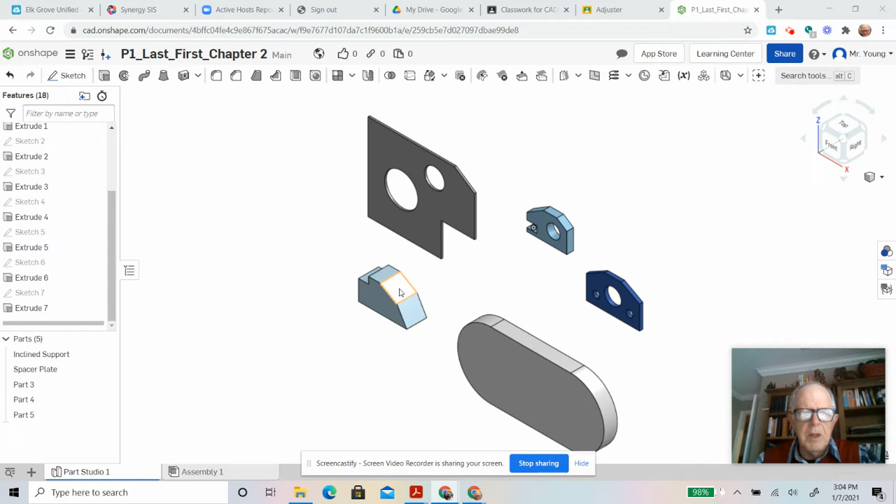Alright, so I'll make it a little bigger, bring in the dimensions real quick. Okay, there we go. Alright, so we've gone ahead and done this. I've talked a little bit in class about how to make that, extruded it.

Now we have to cut this inside out. So let's look at that. We know the whole thing is 1.5 wide from back to front, and up here it tells us that the thickness of the sides are 1/4 inch. So 1/4 inch plus 1/4 inch makes 1/2 inch. So this inside is 1/2 inch less than this, which of course would be 1 inch.

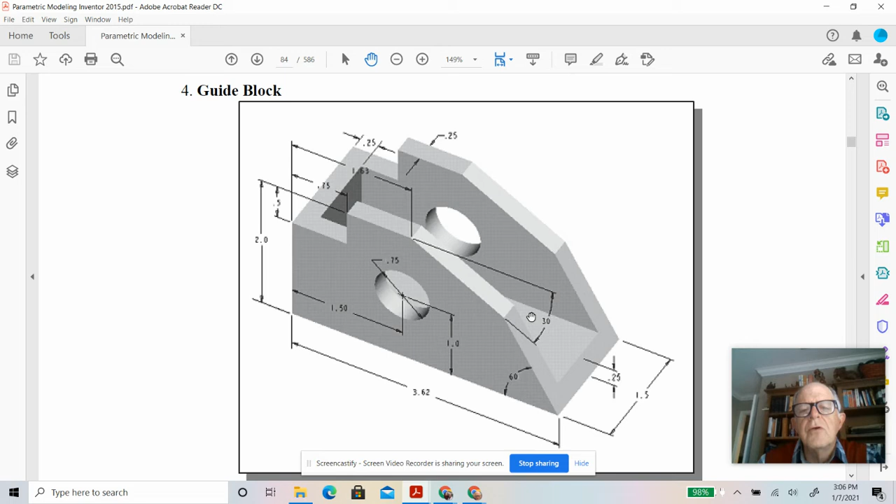It's also 1/4 inch here. Now, how deep is this cut? The cut goes all the way down to the bottom on this inside bottom. The whole thing is 2, and it tells us the thickness of the bottom is 1/4 inch. So it's 1 3/4 from here down to that surface. So the cut has to start on this surface and go all the way down to within 1/4 inch.

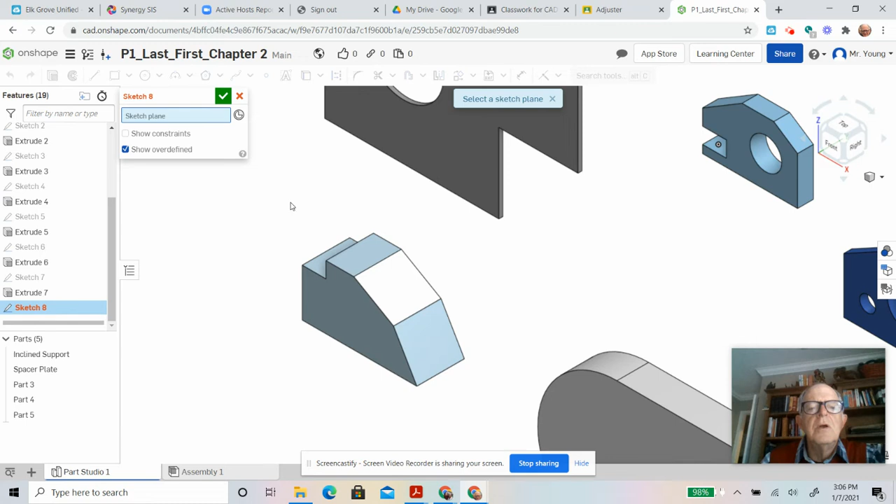So I'm going to draw a sketch. Always we start with a sketch. We're going to draw it on that plane. I'm going to look, that's the top. So look at the top. And I'm going to draw a rectangle, and the rectangle is supposed to be something like this.

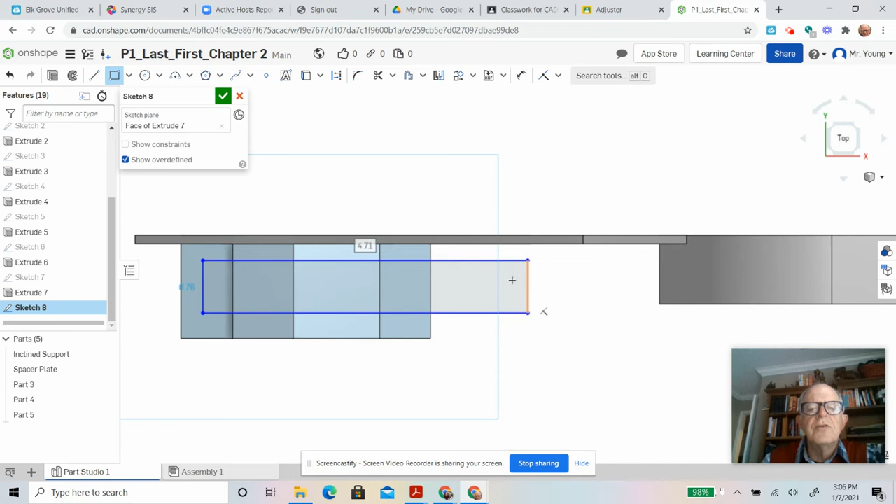Now, remember it's going to subtract. It doesn't matter if it's sticking out. It's just going to subtract what's intersecting with the other.

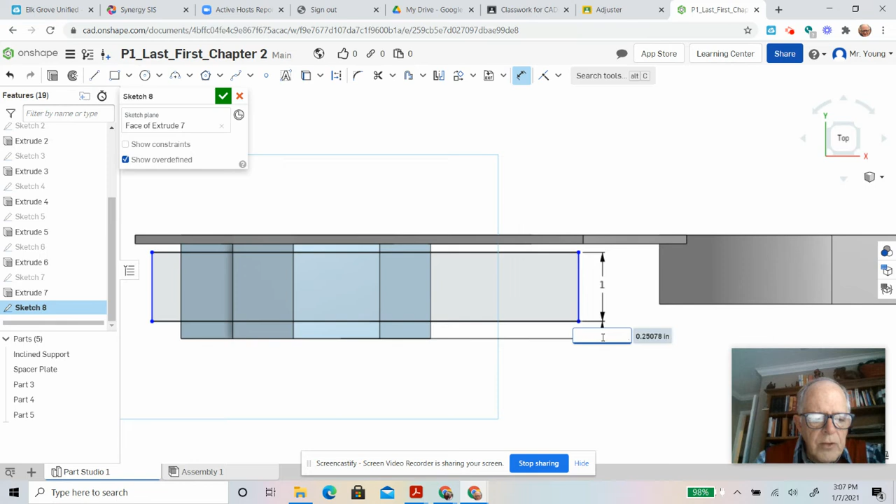We know that this thing has to be, we just said it was 1 inch wide. You can go back to the book and see why that is. And we know that from here to here is 1/4 inch. That means the other side will automatically be 1/4 inch.

Now, I'm going to get out of my tool here, grab this and yank this in here, because that has to be 1/4 inch also. So just dimensioning the rectangle to the proper size.

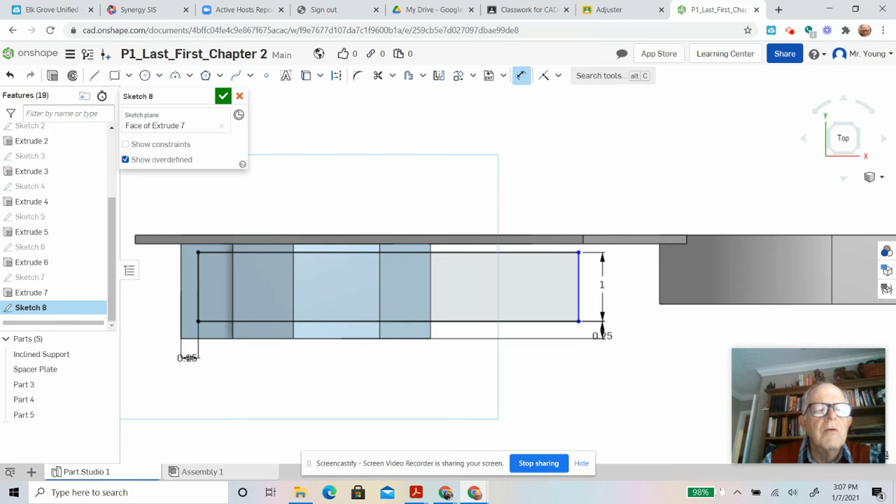All the thicknesses of the sides are 1/4 inch. Now, you can see what I've done here. I've kind of drawn a box on that top surface, inside that box, 1/4 inch from all the sides.

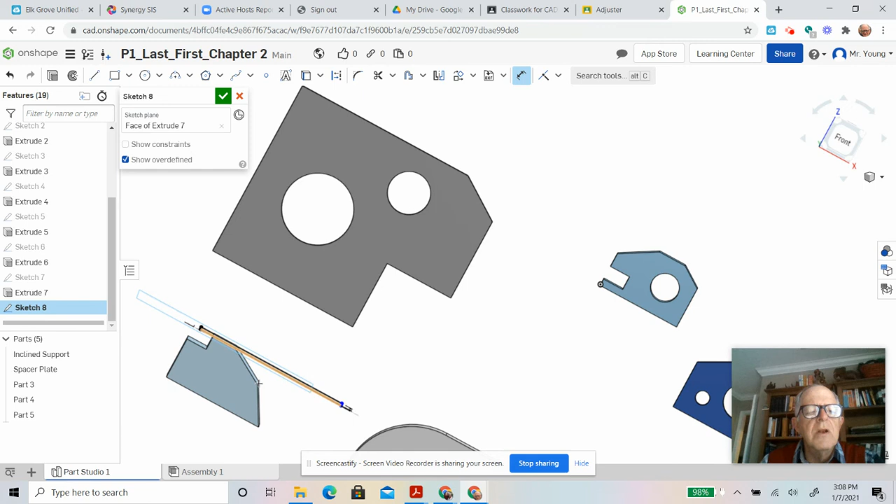And I'm just going to cut it down to 1/4 inch from the bottom. This part that's sticking out, no biggie - it will just subtract from the air, and the air will still be air. But wherever it intersects the solid, it will do its thing. So the sketch is done.

We extrude. We're removing material. And you have to do all - it's interesting, this is not how it is in the other programs I've used. You have to pick all 3 of those. And the depth we said was 1.75.

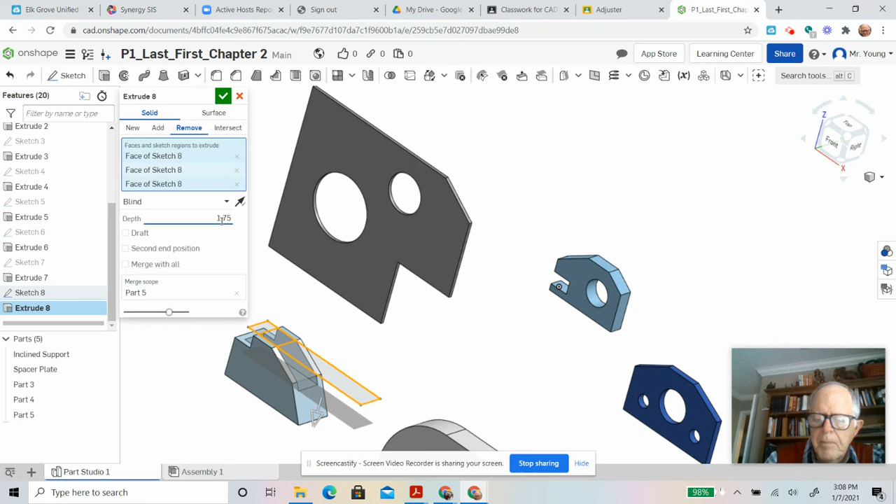Right, so that's it. You have to do something similar on the slotted spacer that's due today. I'm not going to show you how to do that. You can remember how to do it from here, or you can go back to this and get an idea of how to do it again.